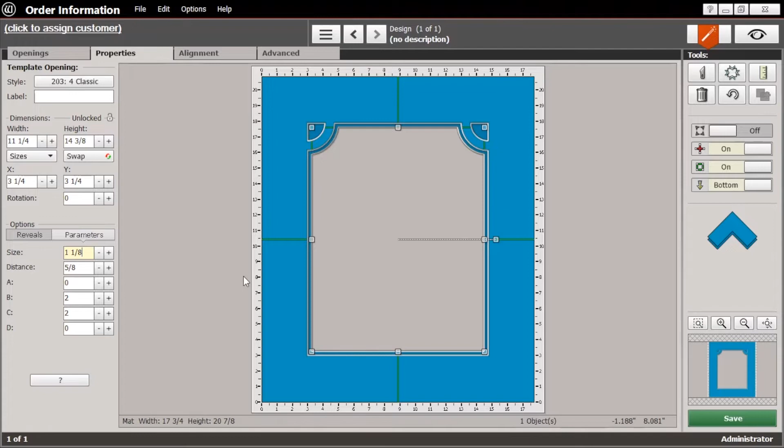And if we do that to another corner, now you have a design that has that little design just on the top 2 corners. Sometimes that can be enough—that might be exactly what you want. So it gives you a huge amount of flexibility between being able to remove certain elements, having those elements just on certain corners, and adjusting the size. You have a huge amount of flexibility very easily.

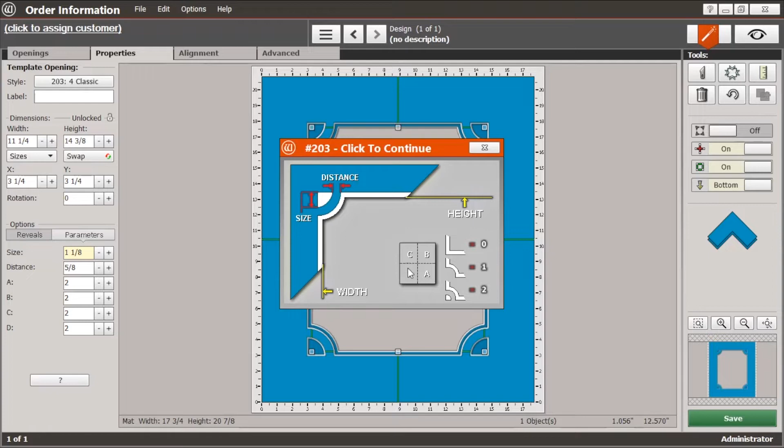Now with some of these designs, there's a lot to adjust, and you may have no idea what any of these change. If you go to this little question mark down here, it'll open up a window that gives you a diagram showing you exactly what all of these different parameters, like the size here, refer to and what they'll change. You'll see here that it has a diagram of the A, B, C, D—the 4 corners—and what setting those values will do.

And even then, sometimes it's not entirely clear what it does. So you're not committed to anything. If you want to see, just start changing things and see what happens. You're not committed to anything yet. You're not cutting any mat, so don't worry about that.

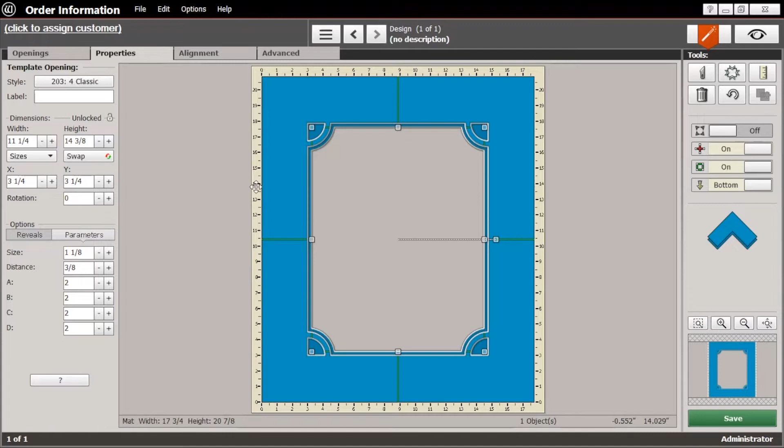Okay, so let's take a look at some others. If I wanted to change that, another way that you can switch from one opening style to another is just go up here to Style. When you click on that, it brings up the menu again.

Let's take a quick look at one of these, the staircase. This has a very Southwest kind of feel to it. But as it is, it might be a bit much. This would look great on a nice piece of Southwest artwork from 1987. It could look rather dated today, though.

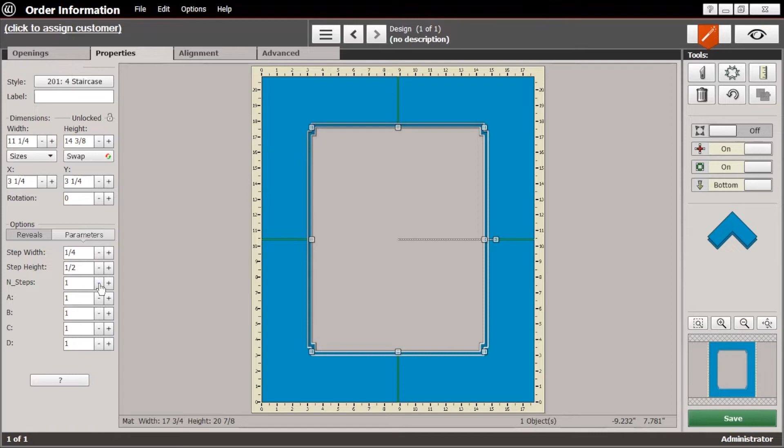So again, you can adjust things and get a more usable design that looks better, that you could actually sell on a regular basis. For instance, let's start by making this maybe just 1 step instead of 3. Let's adjust the width here—make that fairly wide and maybe make the height a bit narrower, so it's just a very gentle little jog there.

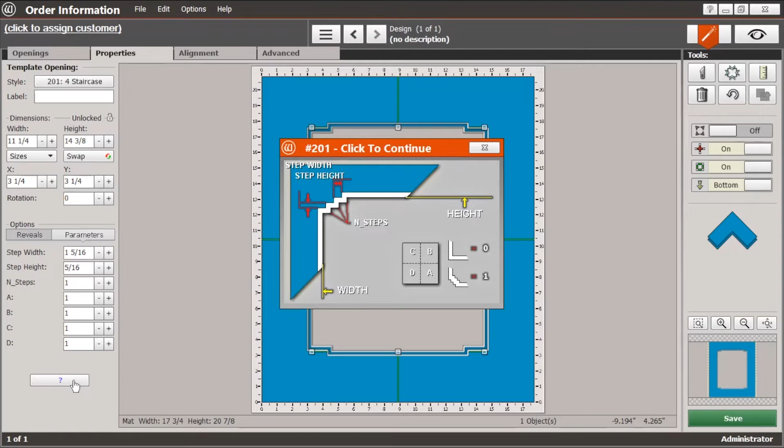In fact, let's take a look here and see which is which. Let's adjust A and D. Now we don't have any steps on the bottom two corners. We took something that had a very Southwest sort of feel, maybe a little bit dated, and made something much more subtle. This kind of has a little bit more of an Asian feel to it, or you could see that as maybe sort of an arts and crafts style that could look really nice on the right artwork.

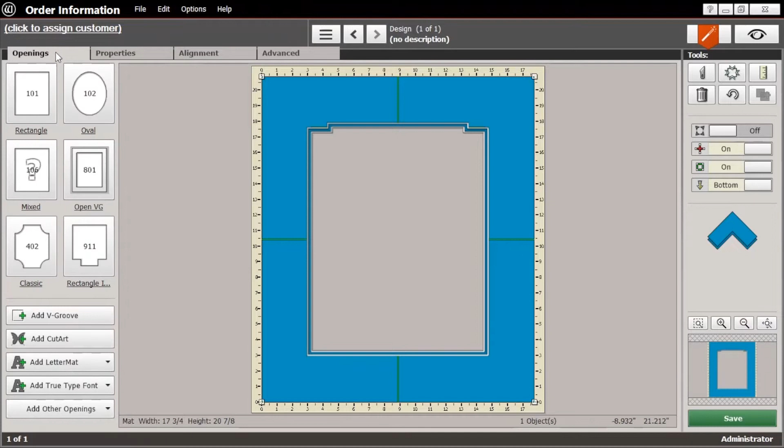Okay, let's go back to Properties again. Click on the opening and go back to our menu here. Okay, I promised that I would come back to the fillet, so let's take a look here.

So this is a double mat, and you'll see here that instead of a mat layer, you've got a dotted line. This represents the inner edge of the fillet. When you're laying out a mat for a fillet, you need to take into account the width of the fillet so that it doesn't impinge on the artwork too much.

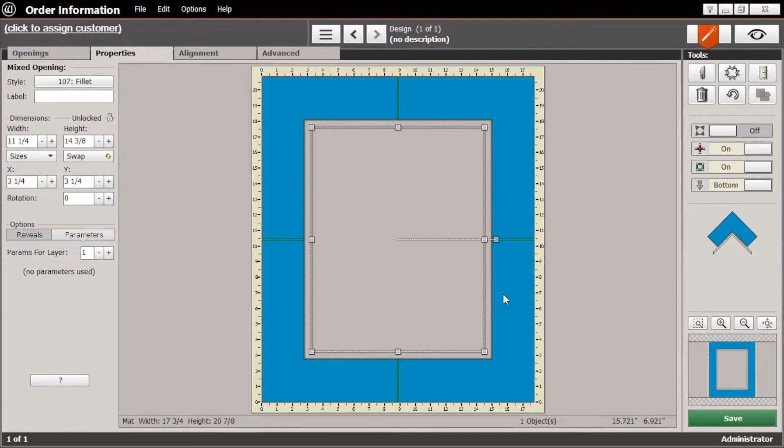Or if you had a triple mat—oops, there we go—if you had a triple mat, you would want to adjust the width there so that you would have the proper reveal for the bottom mat. So what this template does is create a sort of phantom mat layer that will be taken up by the fillet.

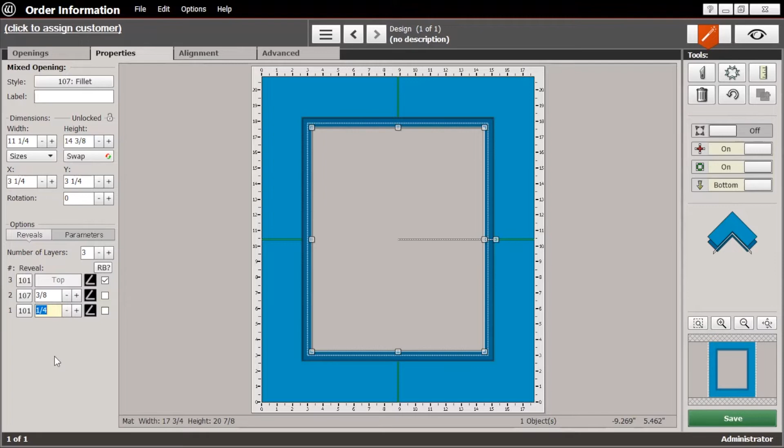So the fillet is going to be layer number 2, and let's say the fillet is 3/8 of an inch wide rather than 1/2 an inch. We'll tab down, and let's say we want a bit more of the bottom mat to show. And there you go, you see how everything is adjusted. Also, you may have noticed the top mat is now being cut with a reverse bevel, so it saves you a lot of mental anguish and calculation. By putting that reverse bevel on there automatically, it's one less thing you have to think about and possibly forget.

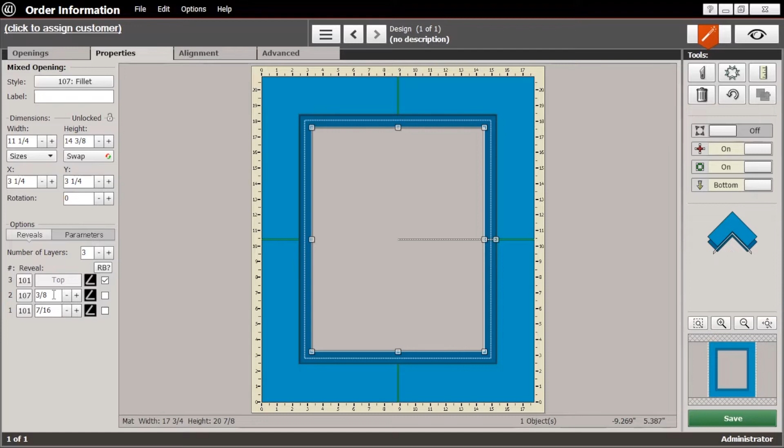Now, the width of the fillet will probably be listed on your work order, but it's a very good idea to take a piece of that fillet and actually measure it yourself, because in the manufacturing of molding, including fillets, there's always some small variations. So the fillet you receive might be from a different run, that might be a small bit larger or smaller than your sample or what's listed on the specs.

This template here, 314, the Camelback Flare, is a good example of how you can modify an existing template through the parameters to get a lot of different looks. This one has a lot going on. You might look at it and think there's not much you can use it for - it has a little bit of a matronly look, I guess you could say. But let's take a look at how we can modify some of these things to create a design we could use pretty easily.

First, let's set the chamfer to 0. Sometimes you can get some pretty interesting things when you set some of these parameters to 0 or even a negative number. So let's just go ahead and make some of these 0. And by doing that, you see we get rid of that little detail at the corner, and we just get a nice little gentle swoop on the top and the bottom.

We could make that a little bit more pronounced by adjusting the arc height. And now we get something pretty nice, something that isn't too distracting, not too busy, but just has a nice little bit of interest. Again, if you're not completely sure about any of these things, just click the little question mark there and it'll bring up your diagram.

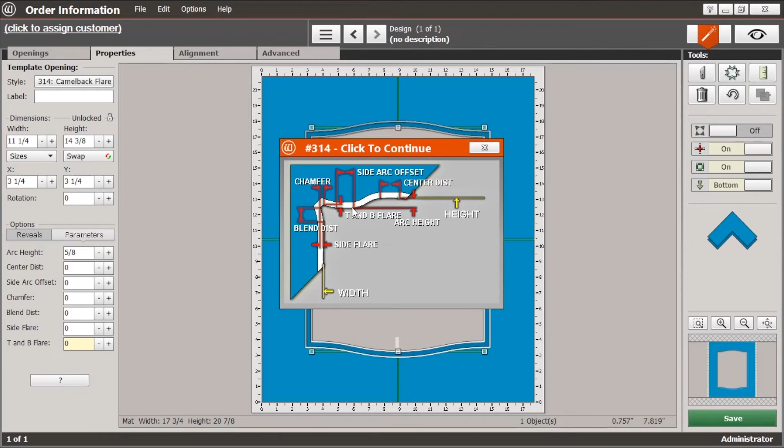Okay, so let's take a look at some other openings that could be useful. I'm just going to put in any random dimensions here - doesn't really matter. And let's go to this one, 506, the star.

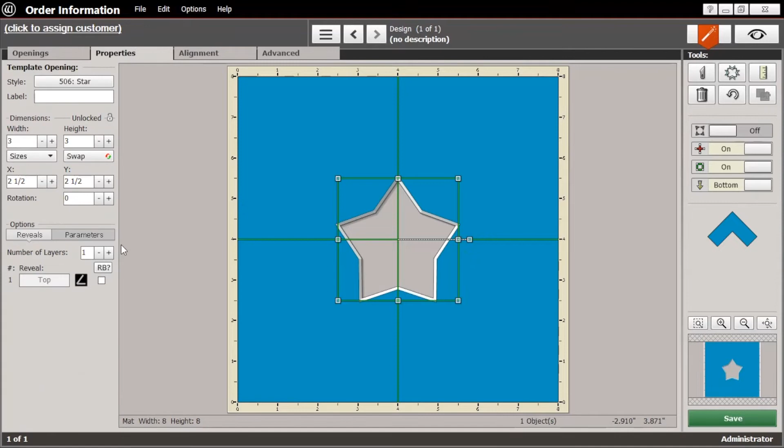You might look at that and think it's not very useful for making much more than just a star. But if we go to the properties and the parameters, we can see there are quite a few things we can use this for. First off, you can adjust the number of points, so you can have a 6-sided star, 5-sided star, and so on. Let's just make that 5 again. The spikiness - I'll change that and you can see what it does. It will make the points of the star more or less sharp.

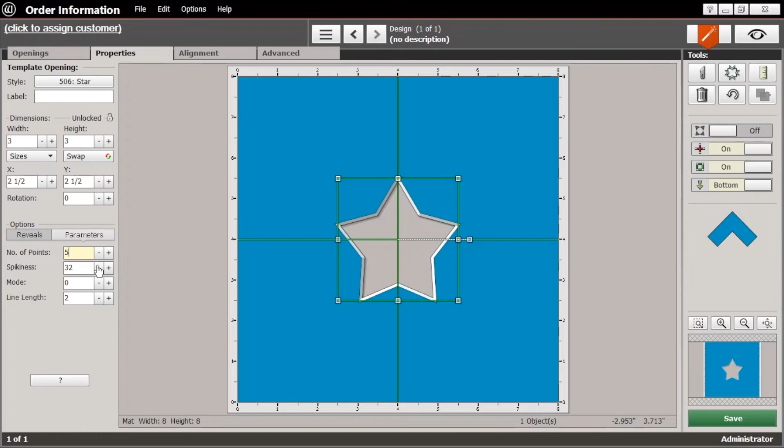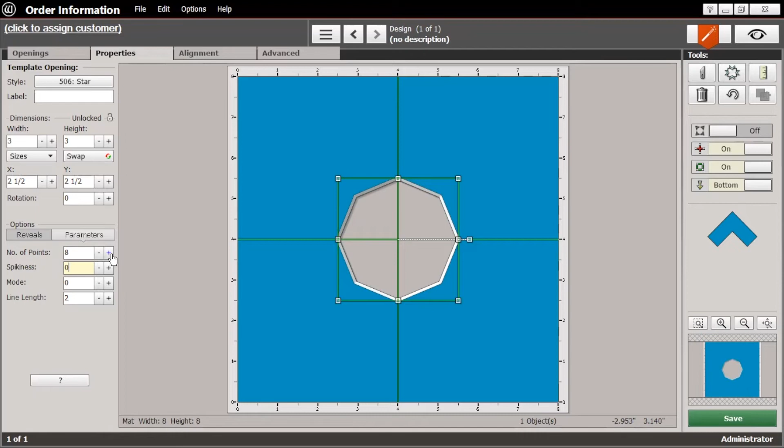But what happens when we make that 0? We get a pentagon. So if you have a need for any shape other than squares or circles, like a pentagon or a hexagon or octagon and so on, this would be the one to use. Just set the spikiness at 0 and set the points to the number of sides you want. And there you go - that's how you can get an octagon or a septagon or a nonagon.

Now let's take a look at another template you might find useful now and then. Again, we're just putting in some numbers just to get some numbers in there. I'm going to select quad, number 111. Let's hit OK. And as you may have guessed, if you're thinking ahead just a little bit, this template will allow you to put different designs on each of the 4 corners.

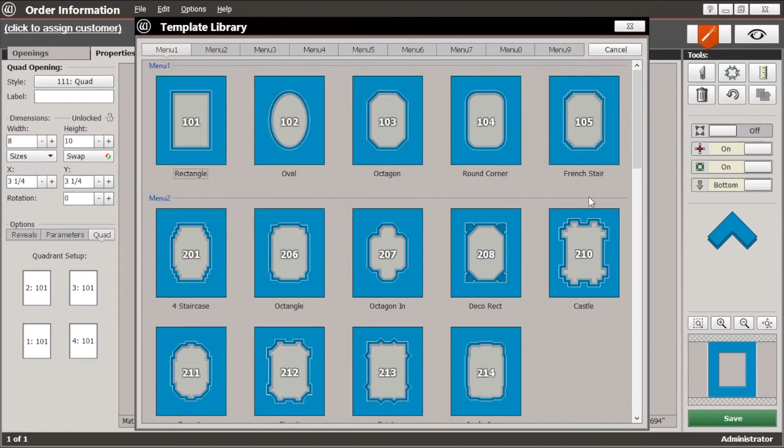When we go to the properties, under options, you'll see here that we have quad, and it gives you the 4 quadrants of the mat. When you click on that, it will bring up the template library and allow you to select a corner from any one of these designs. So for instance, let's see about the octagon, and then on quadrant 4, maybe a rounded corner.

Quadrant 2, maybe the octangle. And then for the third, let's do the angled array. You are getting some very odd looking mats here, but this is just for demonstration purposes only. I don't recommend this in the real world.

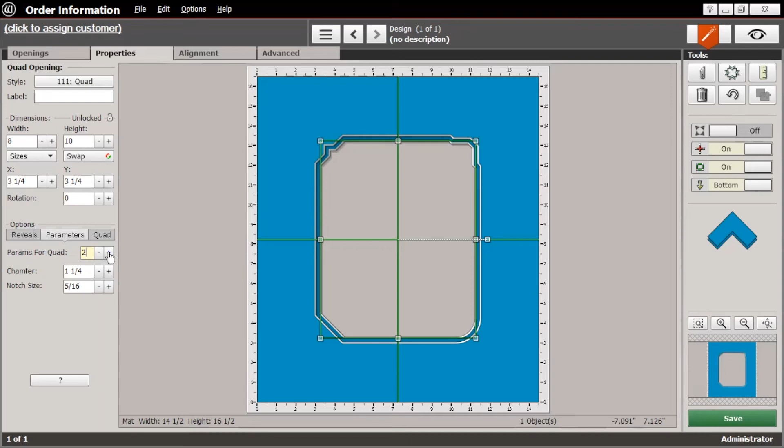If we go back to parameters, it allows you to go from quad to quad, corner to corner, and adjust the parameters for each one depending on the different options available for that design. That allows you to do some really interesting things. Realistically, in the real world, you'd probably use this to apply a design to maybe just the top two corners or the bottom two corners. That's probably where it's going to be most useful for you.

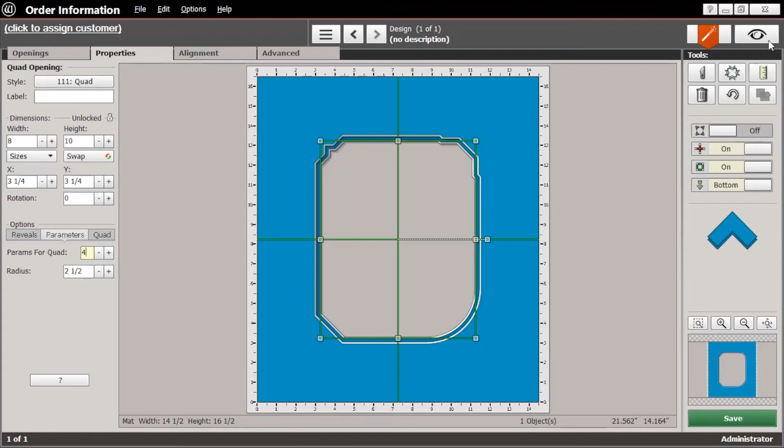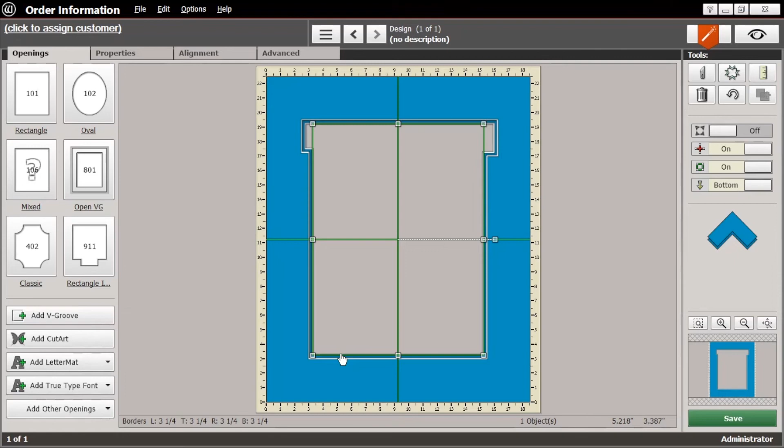All right, let's take a look at some more. This one here, number 705, the newspaper. As the name might imply, it's pretty useful when you're framing a newspaper. Sometimes the customer will bring in the front page from the Super Bowl or the World Series or some big event they want to commemorate, and they'll ask you to frame it to show the headline and maybe just the relevant article and cover up the rest with the matting. So this is the one that would be very helpful for that.

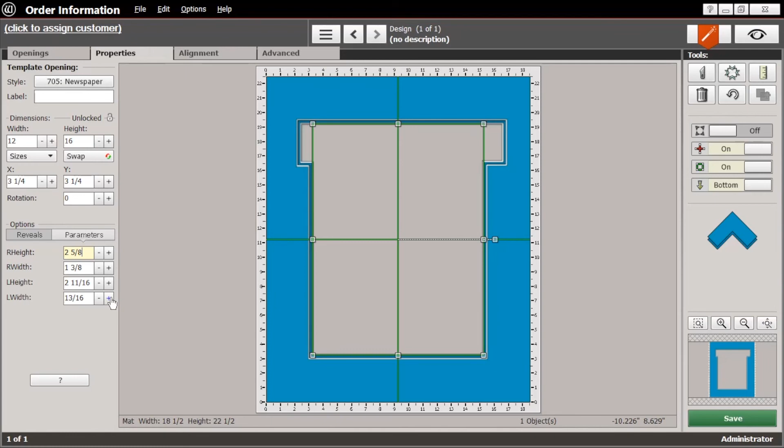If we go to properties and go to parameters, you'll see there are a number of different adjustments here: the height on the right to accommodate the headline, the width. If you bring that out or in, that will let you cover up more or less of the headline and the extra articles. You can do the same thing on the left-hand side as well. So you can just play around with that and adjust it to where you need to get the headline and the relevant things and cover up the rest.

For this, you will be measuring things pretty carefully, but there's sometimes a level of precision that's difficult to get just by measuring. So it would be a very good idea to have some inexpensive throwaway mat board that you can use to make a few test cuts here and there to test this out before you commit to the real thing.

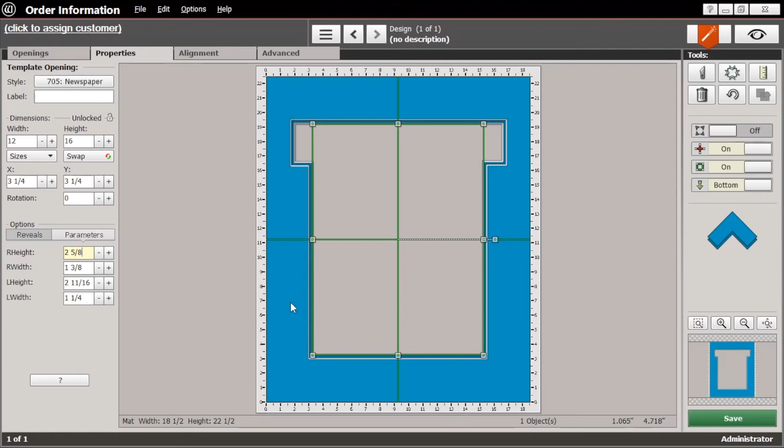Okay, so let's take a look at one or two more things here. Okay, here we go, 703 and 704. Both of these have a main opening with a smaller secondary opening, sort of framed off by a little bit of mat that goes around it.

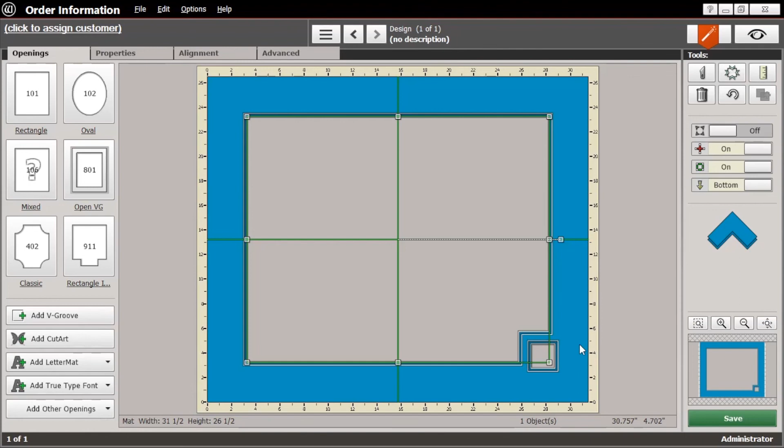This can be very nice when you're framing, let's say, a football jersey. You can put the jersey here and then have a space for a photo, or maybe a baby's christening dress and put a small photo of the baby wearing the dress there. Or it could be a piece of two-dimensional artwork, say a magazine article, and then a smaller photo of the person featured there or something that goes along with it.

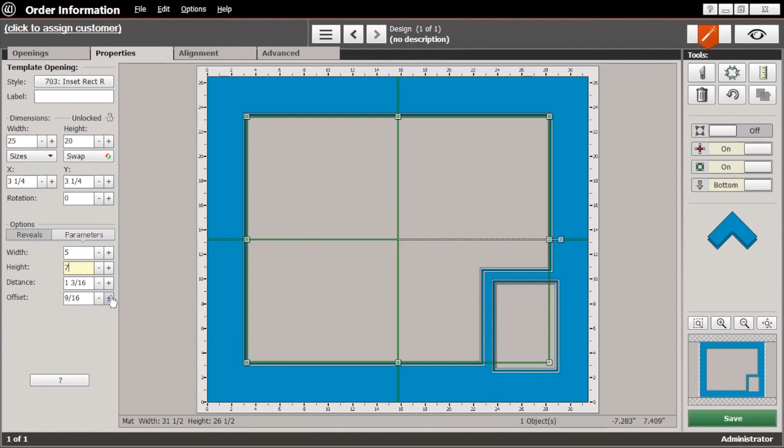If we go to the properties, under the parameters, that allows you to adjust the size of this smaller secondary opening to fit the photograph or what have you. You can adjust the distance between here, this bit, and you can adjust the offset, how far you want it away. Most of the time you would probably want it to line up with the main opening there, but there's no rule that says it has to be like that. You can always adjust it so that it comes out a little bit that way.

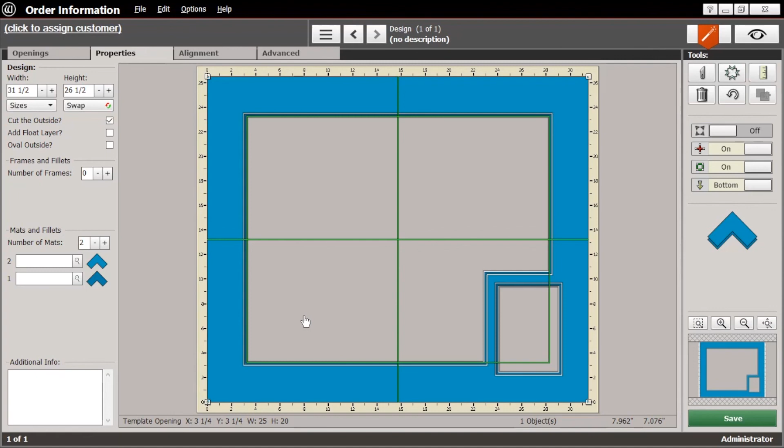You're probably asking, is it possible to put another opening just like that over here on the left as well? It is. It's a little bit beyond the scope of the basic things we're doing here right now, but yes, it is possible. I'll just leave it at that for now.

So there we are. That's not a comprehensive review of every opening possible, but a lot of these are pretty similar, and I've tried to highlight some that would be most useful and versatile for you. Any of the things I've shown you as far as the parameters would apply to any of these that you're using. So I would encourage you to get in here, take a look, and see what these different templates do and what happens when you make different adjustments to them. That's all I have for you right now, and we'll be back with more.